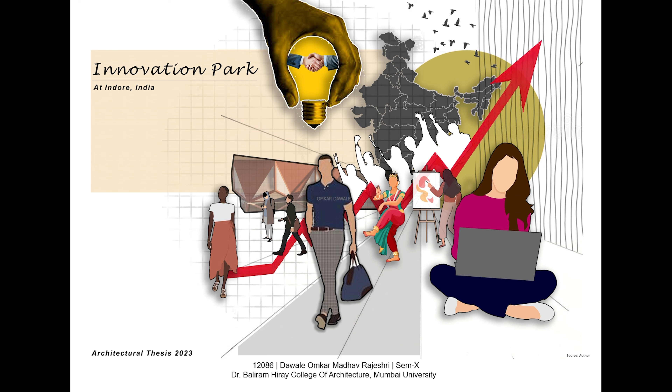The following presentation is divided into four parts: the first is the study with the intro, second is site and concept, third is the plan and section drawings, and the fourth is inside and outside spaces.

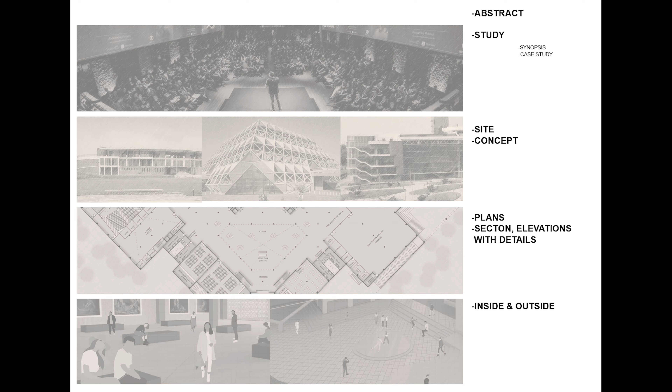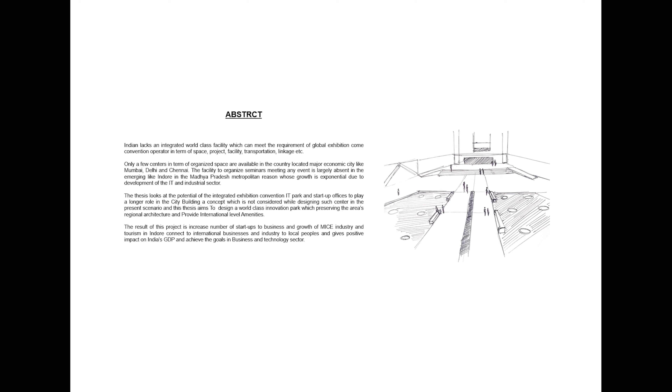Basically India is achieving in each and every sector, but lacking in business and technology. That's why the Indian government is trying to provide this type of facility, like convention centers and startup buildings, in two-tier cities like Ranchi, Indore and Nagpur, to help businesses grow in this field. As a result, the number of startups and businesses increases, helping the growth of the MICE industry and tourism in India, and connecting local businesses to international businesses.

Starting with the study, I did research on where India is achieving in each and every sector: fifth in GDP, second in population, fourth in space and research, third in agriculture, and fifth in economy, but 63rd and 21st in business and technology respectively. So where is the problem?

This is the data of the MICE industry and tourism, where India ranks between 24 and 35, based on data from 2013 to 2017, where India is not growing and not constant. The ranking will keep decreasing year by year.

There's a need for these centers, as half of the population is aged between 25 and 35, and the population is increasing year by year, but the jobs are constant and not increasing. That's why there are no jobs for normal people and engineers, and the Indian government is trying to provide startups to the new upcoming generation.

The solution is to provide this type of facility and centers in two-tier and three-tier cities as well.

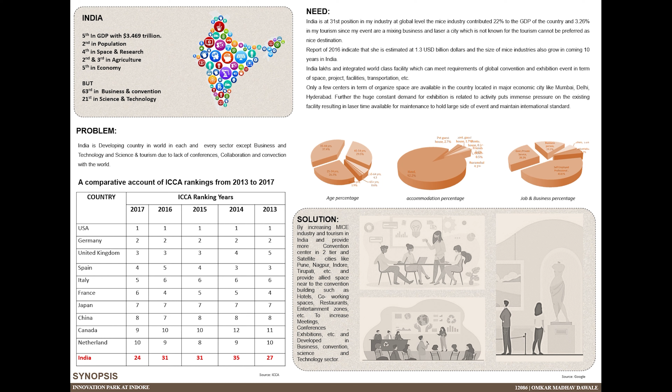Now, the aim of this project is providing an innovation park which preserves the area's regional architecture, while providing international-level facilities and amenities. These are the objectives I am following for my design objectives and scope.

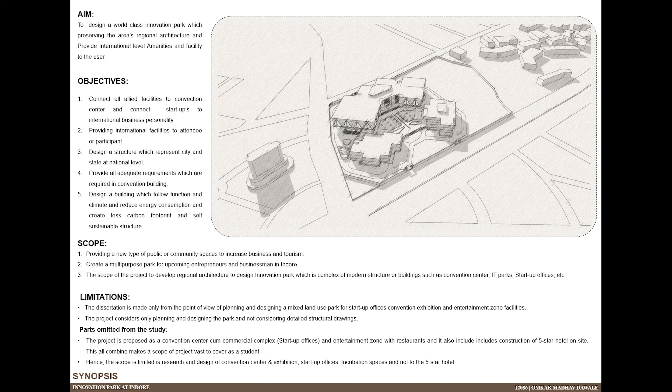As for limitations, some parts of the project I have omitted, because as a thesis for an architecture student, it's a vast topic to cover.

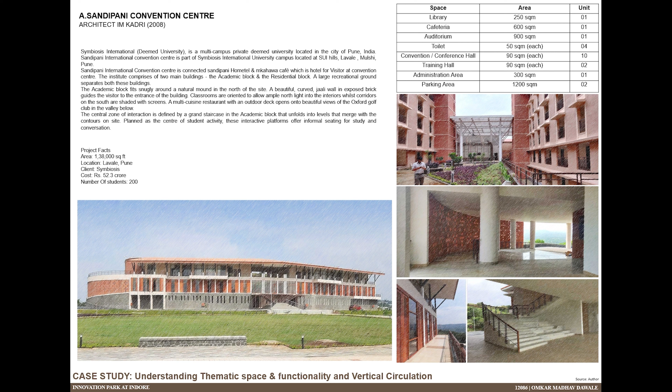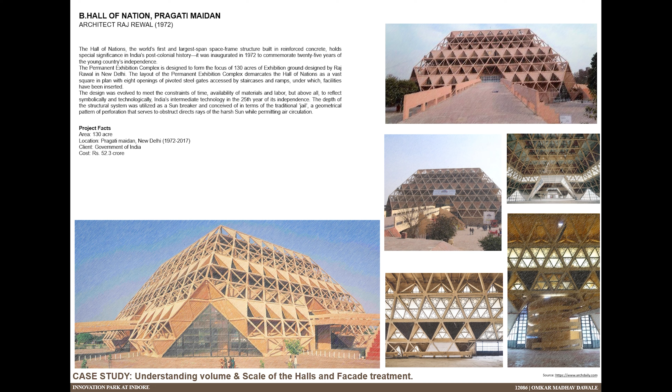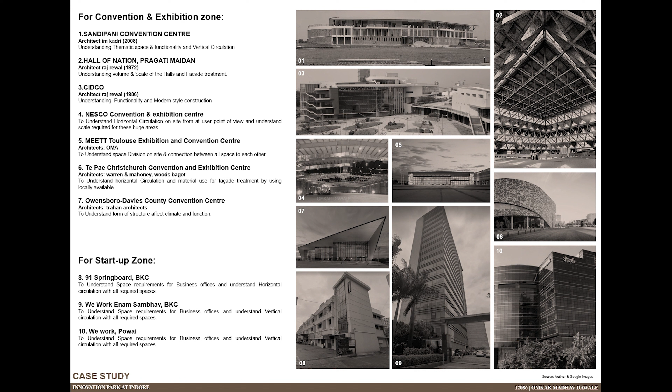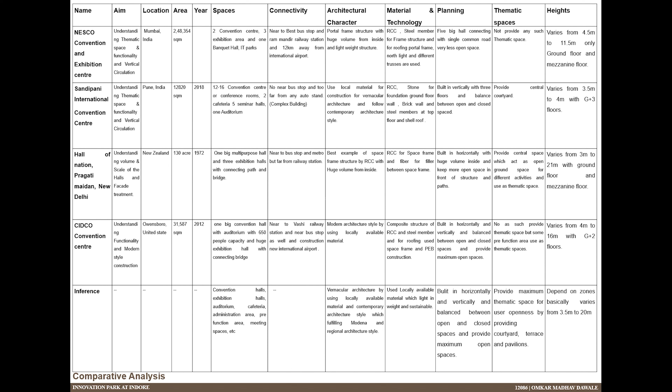These are some case studies I did from 1 to 10 for study purposes. This is a comparative analysis where I took four case studies, compared them, and finalized the inferences, which I'm using in my design.

Now talking about the site and concept, my site is located in Indore. Why? Because Indore is the 14th largest city in India, and the commercial capital of Madhya Pradesh, the biggest city in the state. Half of the population is the young generation, and the commercial industry in Indore has increased by 74%, while the literacy rate has also increased from 64 to 80%.

Talking about the history and architecture, Indore has influences from the Maratha, Rajasthani, and Mughal kings. That's why we can see architectural elements from these three influences in the structures. This is the super corridor; basically Indore is rapidly increasing year by year.

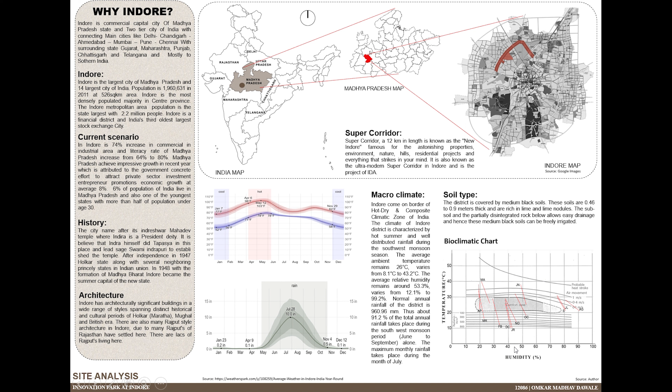Talking about the macro climate, Indore falls under the hot and dry climatic zone and composite climatic zone. The soil type is basically medium black soil, which is useful for vegetation. This is the bioclimatic chart which I drew, comparing temperature and humidity.

Now talking about the super corridor, basically it's a 12-kilometer long road with a 75-meter wide road. In this super corridor, there are multiple projects like a metro station, TCS, regional parks, medical hubs, Infosys, and sport complex, with commercial, industrial, and residential areas.

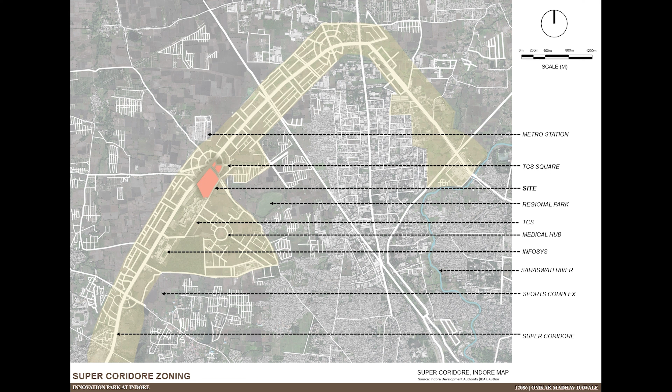Now talking about the site surroundings, at the left side of the site is the proposed five-star hotel, and next to that is my site. At the upper side there is a medical hub, and at the right side is TCS, designed by Somya Bindra Architects, and next to that is Infosys.

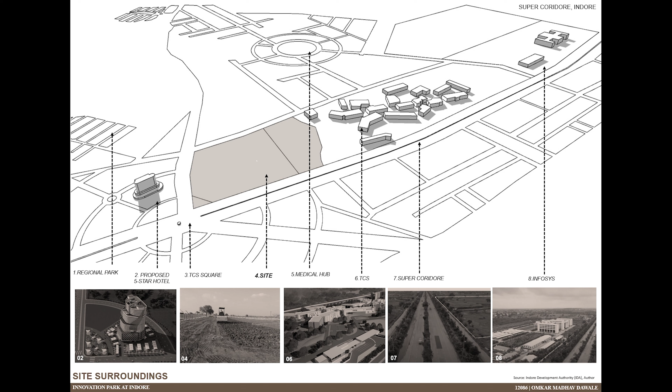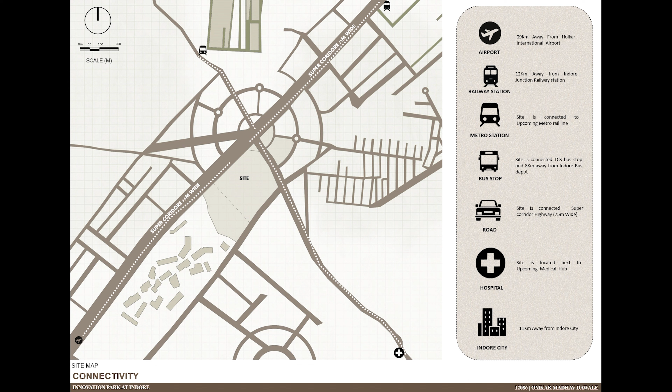Connectivity: the site is connected to the airport 9 kilometers away and the railway station 12 kilometers away. The site is connected to the metro station and bus stop, known as TCS bus stop and TCS metro station, connecting to the super corridor, which is 75-meter wide. At the right side there is a medical hub, so it's connected to that medical hub area.

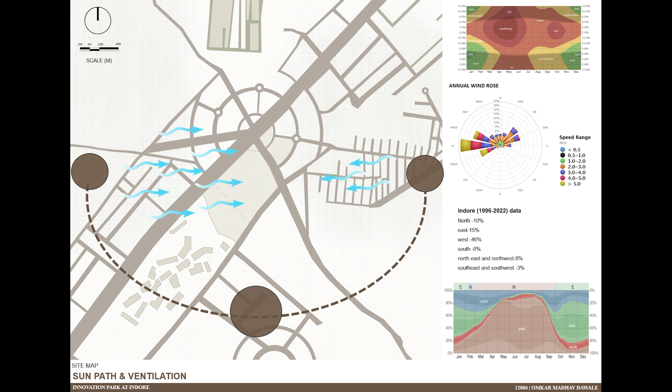In the next slide, I'm explaining the sun path and air ventilation direction, where 46% of ventilation is from the west side annually, and 10-15% from the east side in winter.

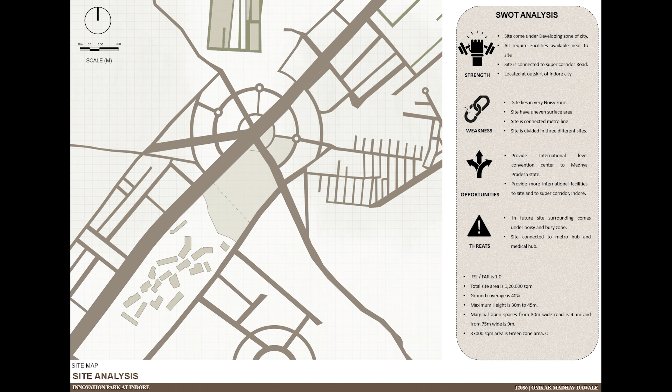The site is divided into three different plots, with the opportunity to provide international facilities and amenities to the super corridor area. The threats are that in the future the site will come under a very noisy and busy zone, which might disturb the convention exhibition area.

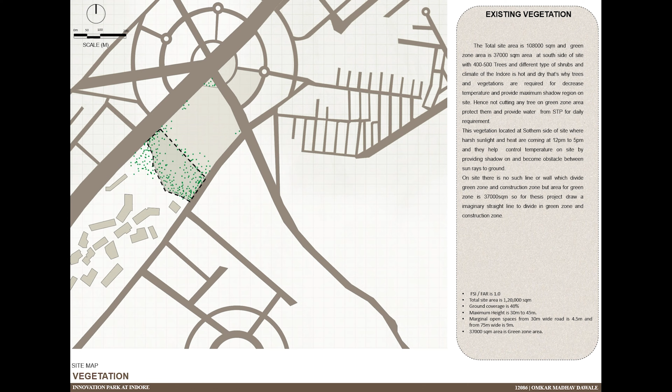Now talking about the existing vegetation, at the southern side of the site is plotted the existing vegetation, where 37,000 square meters come under the green zone area, with a total of 400-500 trees located there. That's why we can't build anything on that plot.

Now for the concept: my concept is form follows function and climate, by providing thematic spaces. Firstly, thematic spaces are spaces placed between two important things, basically terraces, courtyards, and pavilions. As an example, it's like a ghat between the river and the city, providing openness, emptiness, or breathing spaces, used for community interaction, social meetups, and breathing spaces.

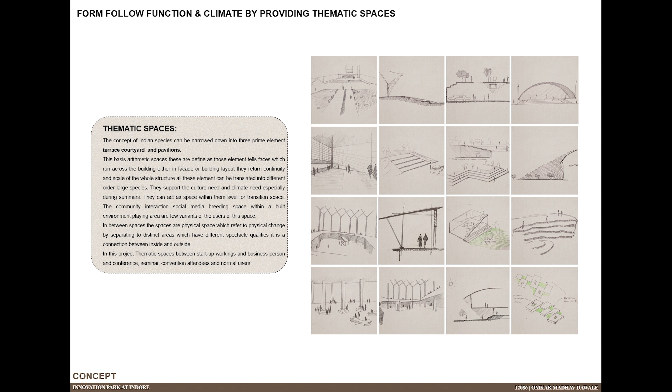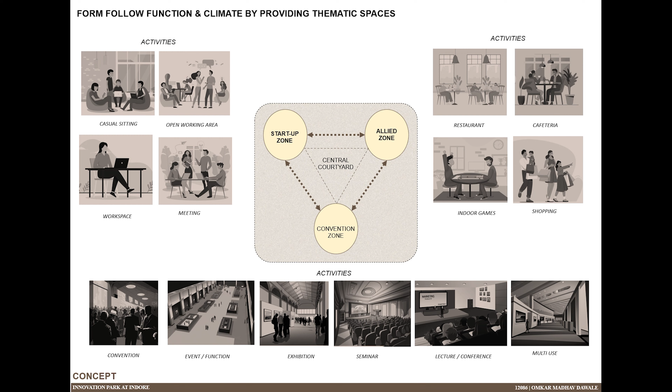Now, form follows function: I'm dividing my site into three zones based on functionality and activities. At the left side I divide the startup zone, at the right side the allied zone, and at the bottom the convention zone. At the center I'm providing the thematic space as a central courtyard. The next slide is form follows climate, where at the southern side I'm providing big huge blocks.

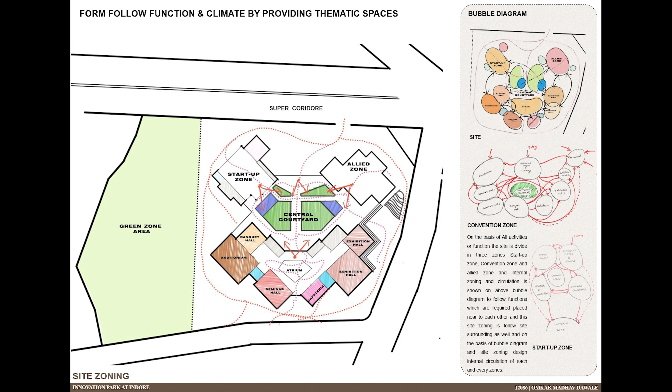Based on the schematic zoning, I drew the bubble diagram and site zoning, and these are the internal bubble diagrams of the convention and startup zones.

This is the second concept, where I'm following the climate, using cuboids as a space, providing big huge cuboids at the southern side to provide maximum shadow at the central courtyard part, where maximum shadow falls on the central courtyard, decreasing the temperature at the central courtyard part.

As I said, 46% of ventilation comes from the southern side, so I'm using the venturi and funnel effect here. In the startup zone, I lift the first floor and create a funnel to pass air ventilation through it, and provide a water body to convert the hot air into cooler air.

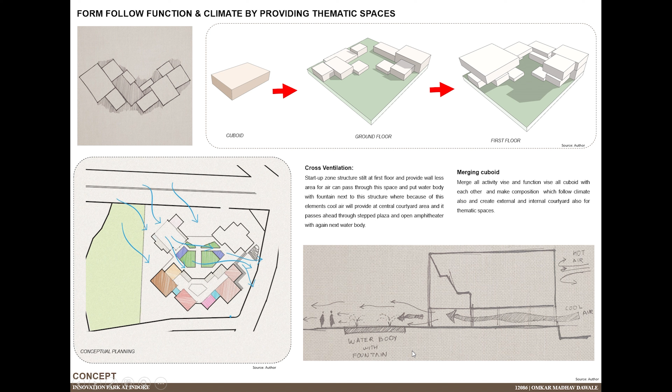Now coming on the drawings, starting with the site plan, where the site is connected through three major roads. The first road is a super corridor, 75 meters wide at the front side, and the other two sides connect to the service road, which is 30 meters wide, providing two main entries and two main exits, along with one service entry.

At the upper side is the main entrance, and here is the drop-off area. Basically the site is divided into three parts: the startup zone, allied zone, and convention zone. At the left side is a green zone area where I cannot build any superstructure on this plot. At the center is the central courtyard, and at the right side is the open amphitheater area. At the bottom is the main VIP entry and exit, and this is the service entry.

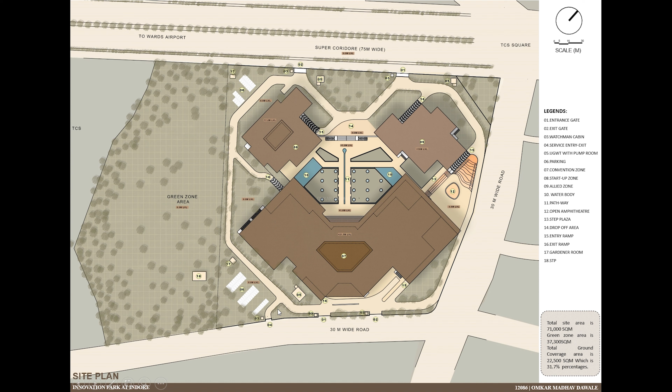The site area is 71,000 square meters, and the built-up area is 22,000 square meters.

Now starting with the first zone, the convention zone. This is the main drop-off area, and the user can walk in from here to this point, which is the main entrance, 20 meters wide with an 8-meter huge gate on this side and that side. At the entry, one experiences the huge double-heighted central atrium.

Basically I'm dividing this convention zone into two parts. The right side is for the exhibition and the pre-function waiting area with the cafeteria block, and the left side has the auditorium with the banquet hall and seminar with individual toilet blocks, providing the AHU room on the left and right sides wherever required. The exhibition hall is connected to the external step plaza area.

At the first floor, again on the left side is the auditorium hall with a small convention hall with capacity for 900 people, and next to that is an administration block with a convention room.

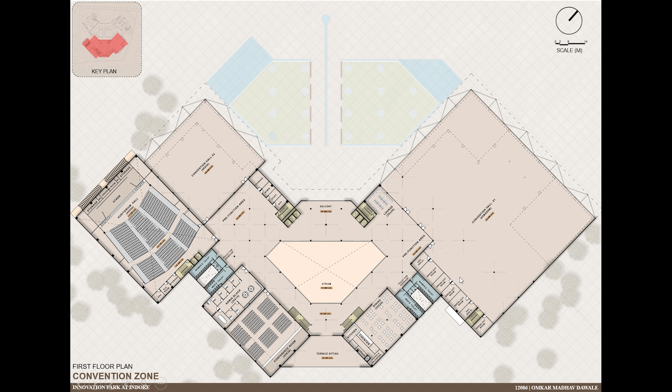At the right side is the terrace sitting or terrace balcony area with a double-heighted space. This is the cafeteria above the cafeteria block and the toilet block, with a multi-purpose room or convention room. This is the main convention room with capacity for 2500 to 3000, with breakout rooms required for conventions or conferences.

Now coming to the startup zone, at the ground floor I'm providing casual sitting or open sitting area where people can sit, work, and eat. Multi-purpose activity and multi-use for multiple activities can happen at the same time, and this is open for all. Basically at the ground floor this is a wall-less structure, only columns are provided.

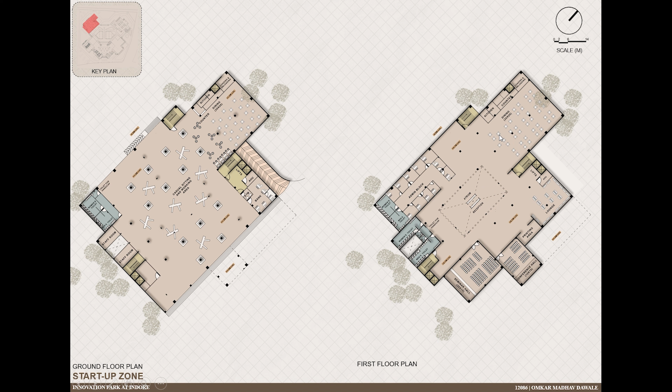At the first floor, I'm providing the reception area with waiting area and admission block on the left, and the cafeteria block for everyone, plus meeting and conference rooms. Coming to the second and third floor, these are basically office areas or startups where people can buy or subscribe rooms for a period of time, as part of the working subscription.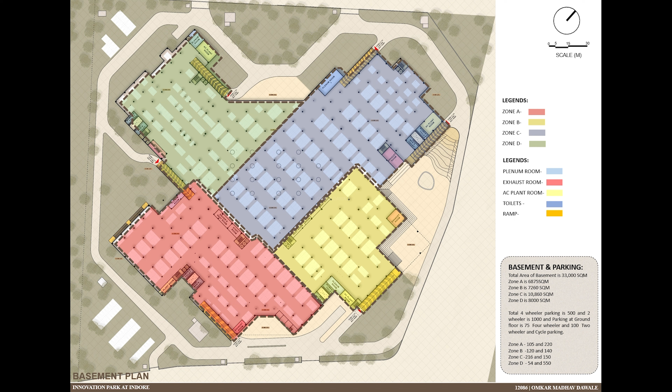Coming to the basement, I've divided it into four parts: red, yellow, blue and green, where each zone provides individual plenum, exhaust and AC plant rooms. The total basement area is 33,000 square meters, with total four-wheeler parking for 500 vehicles and two-wheeler parking for 1,000, with ambulance parking provided at the ground floor only.

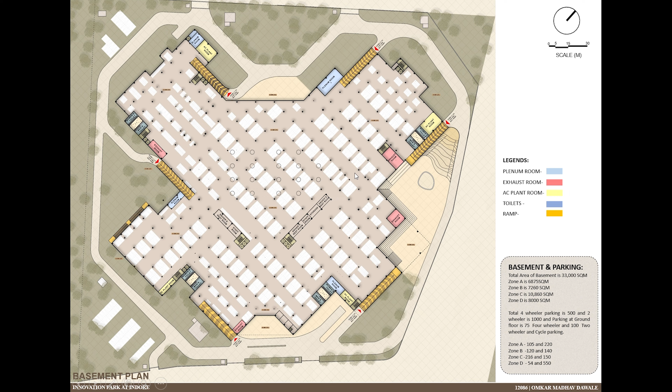Now coming to services, for water supply and drainage I'm providing 3 UGTs for the three different buildings, because the distance between two UGTs is more than 100 meters.

That's why I'm providing individual UGT for individual buildings, and this is the detail of the UGT. The second is the calculation of the underground water tank.

Next is the STP calculation, where I'm providing the IC chamber for each and every building. The startup and convention building connects the IC chamber to the STP, and the third zone is the allied building, which is connected to the municipal drain because it's far from the main STP, and it's basically a future expansion building. So thinking of the future, I've connected it directly to the municipal drain.

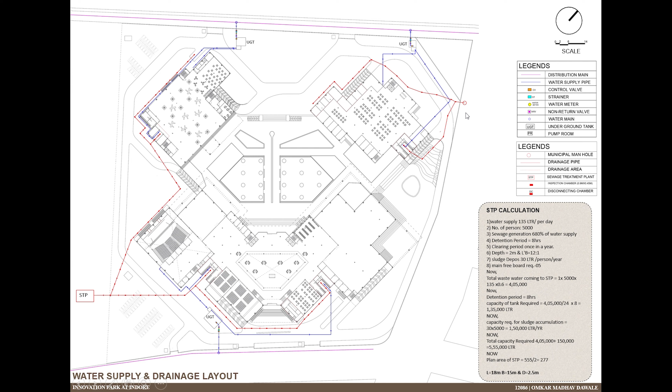Coming to the electrical layout, where I'm providing the electrical substation, feeder pillar, and different meter rooms in the structure, and the different types of wall lights connection, landscape bollards and pathway lights, street pole lights, and waterproof LED lights as well.

The electrical substation is provided at the existing location, exactly where it exists, and the feeder pillar is provided at 45-meter center to center distance, and a meter room in each and every structure.

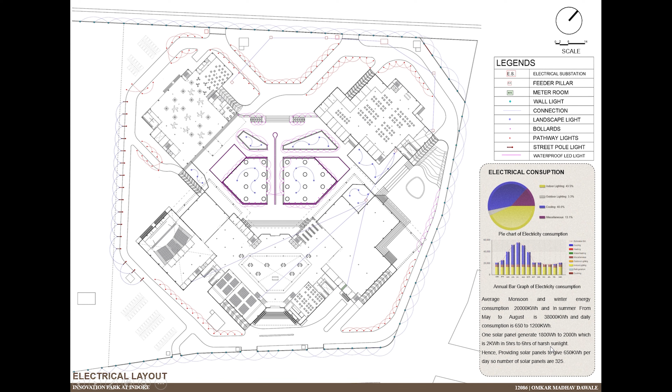This is the annual calculation of electrical consumption by the structure, divided into daily consumption use, where my structure is using basically 650 to 1200 kilowatts of electrical consumption. For that requirement, 325 solar panels are required for the electrical consumption.

Coming to the third service sheet, which is the fire hydrant layout. The fire hydrant layout is connected to the rainwater harvesting tank. This is the calculation for the same, providing fire hydrants at a 45-meter center to center distance.

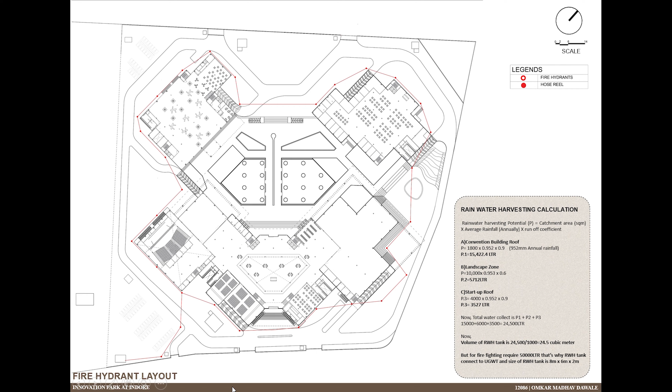Coming to the mechanical ventilation layout at the basement, where the basement is divided into 4 zones. Each zone has a plenum and exhaust zone, which varies from 65 square meters to 125 square meters with respect to the zone areas. The blue one is the supply pipe, and the red one is the extract pipe, and this is the sectional detail of the duct at the right.

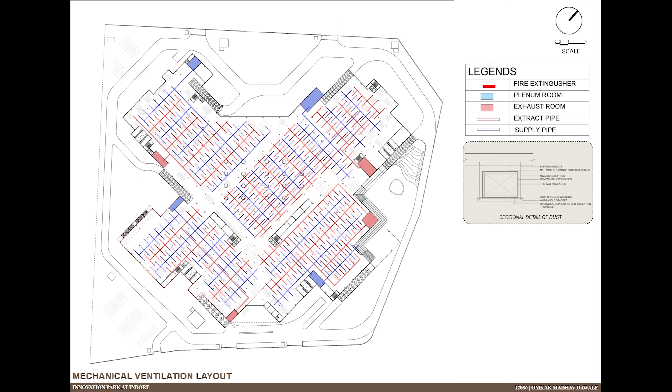Next is the air conditioning layout, at the ground basement and at the first and second floor, providing AHUs at the other floors. The blue one is the supply duct, and the red one is the return duct, which is 450 mm in diameter, or 450 by 450 in distance.

This is the sprinkler layout which I am providing in the basement, required at the basement and connected to the main duct at each and every zone. This duct also goes through the first and second floor for the toilet block, as well as the fire duct.

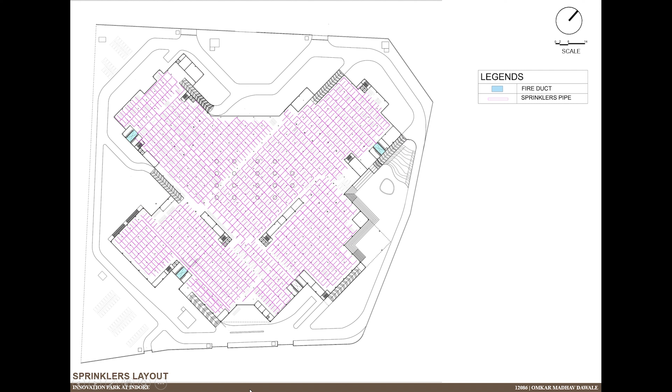I'm providing the emergency lighting layout, where the lights are provided at the driveway path area, which are basically sensor lights. The structure basically operates during daytime and afternoon, but sometimes it works in the evening or night time, and at that time it will be usable.

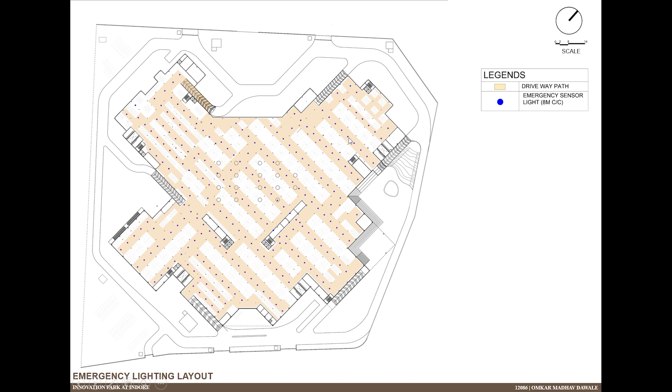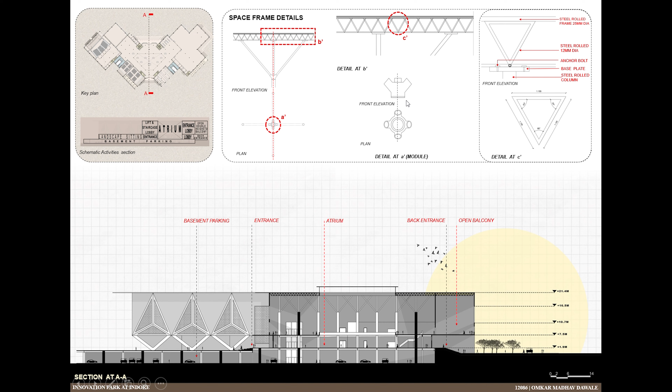This is a detailed sectional detail. These are the details of the space frame, showing the connection between the RCC column to steel beams with the space frame. This is the detail of the steel column to the space frame. This is a module I'm using here, and this is the space frame detail, and this module connects the RCC column to the steel beams. This is the plan for the same.

Coming to section BB, which cuts the plan diagonally, where this cut is at the left side of the auditorium block with the basement area, and at the right the center atrium with the hydraulic lift and toilet area, and at the side the seminar hall, followed by the open balcony elevation and the other elevations.

Above that, the detail section at A dash, where I'm showing the basement detail, providing the external wall with the window or opening, which is an openable window for ventilation and light purpose, and these are the details for the same.

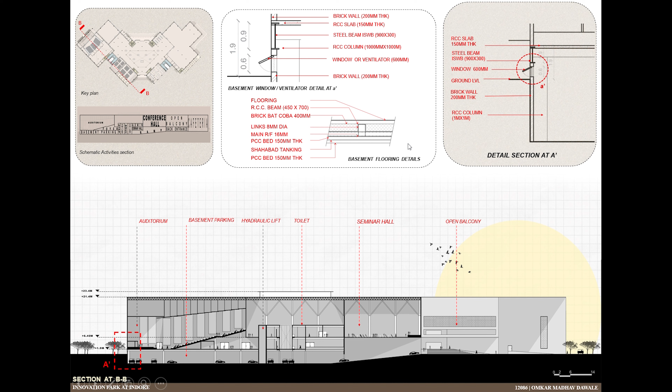Coming at section CC, which is cutting diagonally through the exhibition hall and the multi-purpose hall. At the left side is back entrance with the open balcony area, and next to that is the central atrium part, and next to that the basement parking and the multi-purpose hall, which is 15 meters in height.

At the ground floor they're providing the exhibition hall, which is connected at the right side to the step plaza area. Above that is detail section B dash, showing the facade treatment on the first floor, where I'm using jali detail on the facade, which allows only light.

This is basically the facade treatment, which is a tetrahedral shape that comes out and in. You can see the isometric view on the plan and elevations as well.

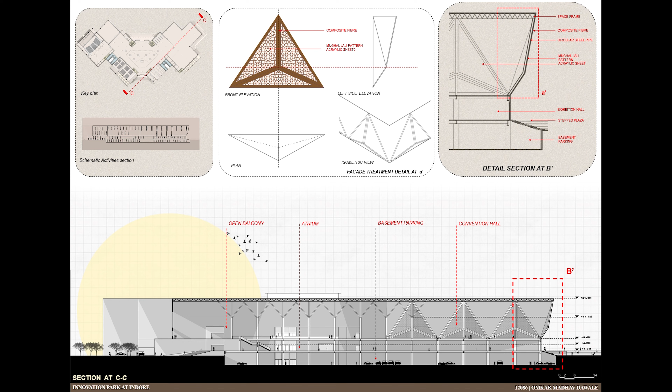Above that, section C dash shows the connection between the RCC column to the steel column with the space frame and the skylight.

As I'm following the regional and local architecture, that's why I'm providing this jali detail, where the jali module represents the detail of Mughal architecture, which allows only light in some spaces, but in other spaces allows both light and ventilation as well.

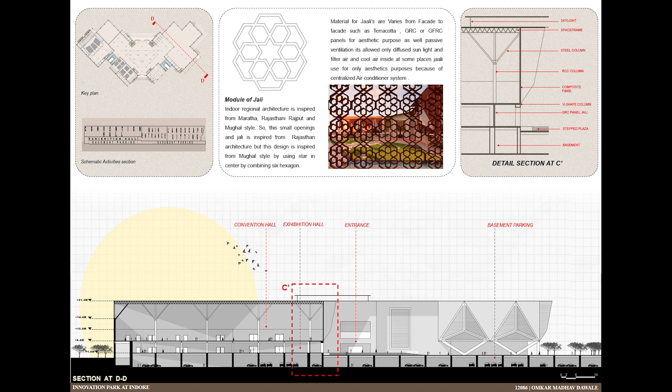Coming at section EE, which is cut diagonally for the startup zone. At the left side at the ground floor, this is a casual opening area or casual sitting area.

At the first floor is the central atrium with the reception area, and the second and third floor is the working area, with the right side being the open terrace area, which is a transition space for the workers, startups and local businesses, where they provide a thematic space where they can meet, gather and have talks between them.

For the construction, I'm using a composite type of construction with RCC and steel structure, where external columns are 1 meter by 1 meter in dimension and internal columns are 750 by 750. External walls are 200mm, internal walls are 100mm, and slab thickness is 150mm thick.

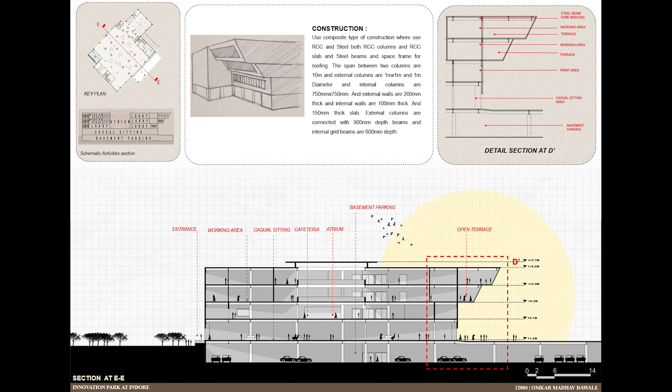Now coming at section FF, which is cut diagonally on the other side, again for the startup zone.

At the left side is the staircase block, showing different levels and internal heights, and at the ground floor again the open sitting area and open working area, the reception and cafeteria block, and the second and third floor with the toilet block.

As shown in detail E dash, I'm showing the detail of the skylight, which allows only light for the central part while avoiding air and water, and it removes hot air from the skylight at the angle level over here.

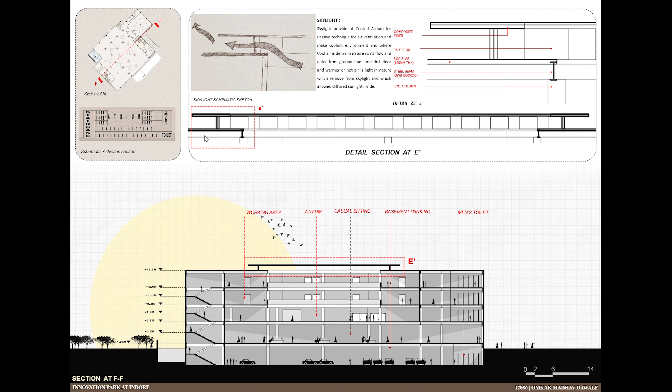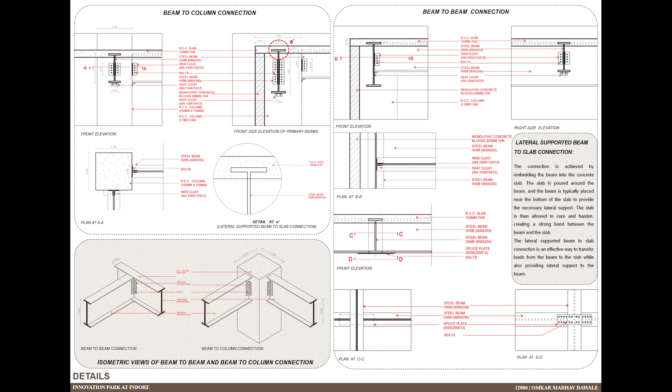For the connection between the beam and the slab, I'm using a laterally supported connection, which helps carry the maximum load as a lateral unsupported beam, and these are the isometric views for the same.

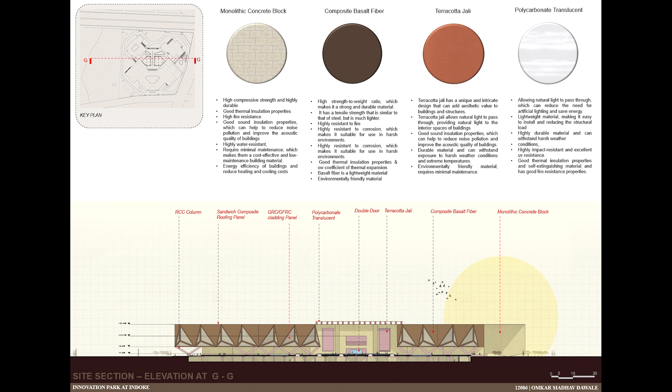Now coming at the elevation, section elevation at GG, cutting the horizontal side, showing the front elevation of the main convention primary structure. I'm using monolithic concrete for the ground facade, composite basalt fiber at the first floor facade treatment, terracotta jali for the jali details, and polycarbonate translucent material for the skylight, which allows only diffuse sunlight and not air and water.

Coming at the section elevation at HH, cutting diagonally through the site, showing the startup buildings, the secondary building and the convention building, where I'm using GRC and GFRC cladding panels for the first floor jali details, which allow only light, not air and ventilation, for the centralized air conditioner inside the structure, and some sandwich composite roofing panels which diffuse and reflect heat and light, and RCC columns and red sandstone for the landscape area.

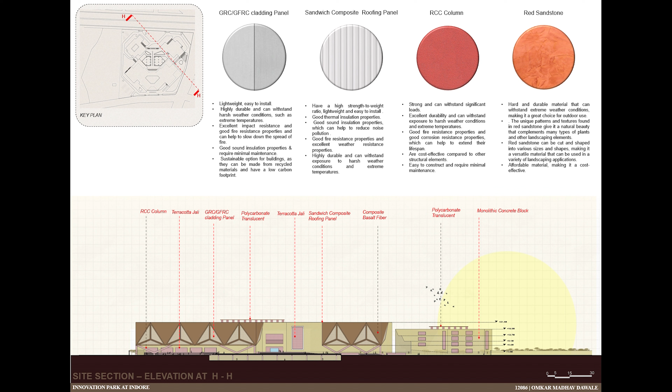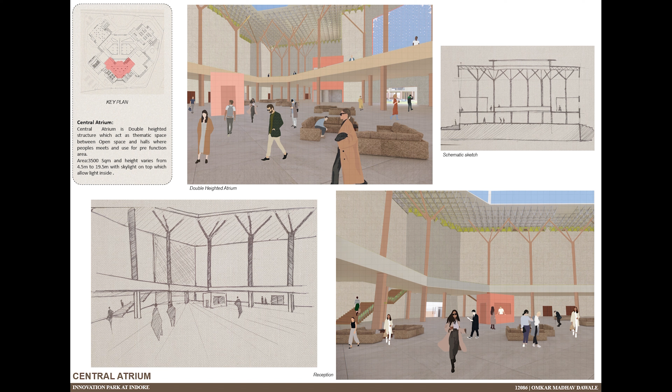Now talking about the inside and outside spaces, the central atrium is basically used as a thematic space, a connected breathing or open space which provides for the user where they gather, meet, and have community interaction. The height varies from 4.5 meters to 19.5 meters. These are the some sketches and views of the same.

Second is the waiting area and the pre-functional area. Again, I'm providing thematic spaces with large openings. This opening is provided at the jali detail, but only allows light, not air, by providing glass from the inside. And these are the sketches and views.

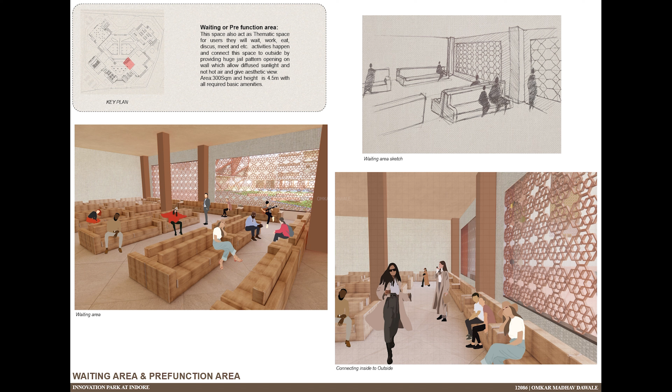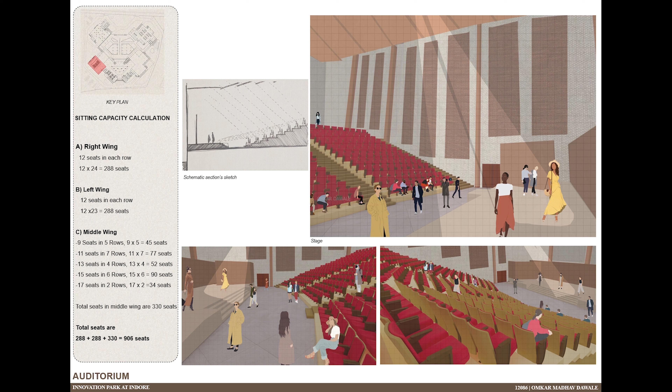Coming at the auditorium block, where I'm providing the auditorium for 900 people. By calculation, at the left there is a right wing and left wing with 288 seats, and the middle wing provides 330 seats. For handicapped people, the first row sitting area is provided.

These are the sketches and views for the same, providing acoustic treatment at the walls for reverberation time. On the left side, I'm providing the reverberation calculation using Sabine's formula, and the result of this solution is 2.033 seconds, which is in the acceptable range. And these are some sketches, sections, and views for the same.

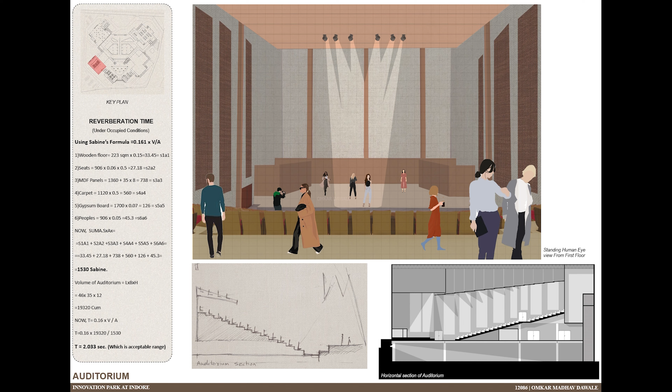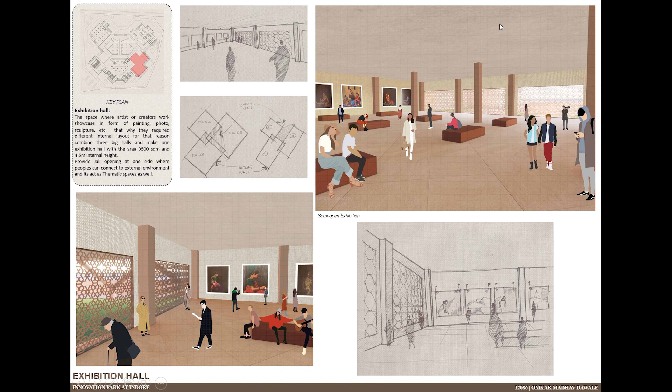And the total area is 3,500 square meters, and it's connected to the external state plaza area as well.

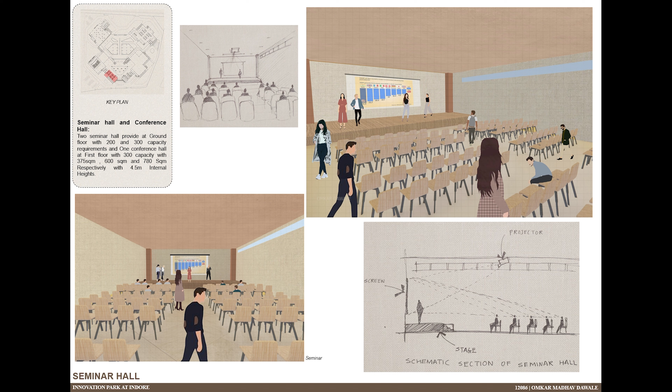Now coming at the seminar hall, basically a typical seminar hall providing diffuse sunlight or daylight through a small window on the right side, above, which allows only diffuse sunlight, not air and rain. Coming at the convention and multi-purpose hall, these are some sketches and views.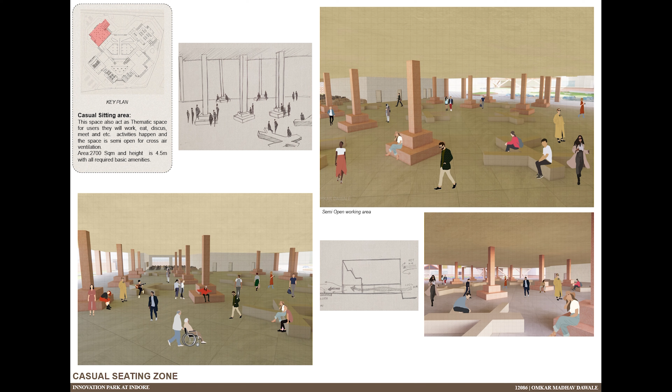This space acts as a thematic space as well. As you can see in the key plan at the left side, this is a startup zone, a plan of the same casual sitting area.

At the right is a drop off area with the basement parking here. The car will go from this direction into the inside of the structure.

This is a drop off area where people and users can be dropped off by public or private transport. If it's public transport, it will go out from this direction. If private, it will go into the basement only.

There are total six ramps, three for entry and three for exit, which are 6 meter wide two-way ramps.

This is the central pathway area, with the center providing water bodies and garden area with skylights in between them. It acts as a landscape element, but it's used for sunlight and diffuse sunlight for the basement purpose.

At the right side is the allied building and the convention building, and at the right side is the step plaza and open amphitheater, used for both the same purpose.

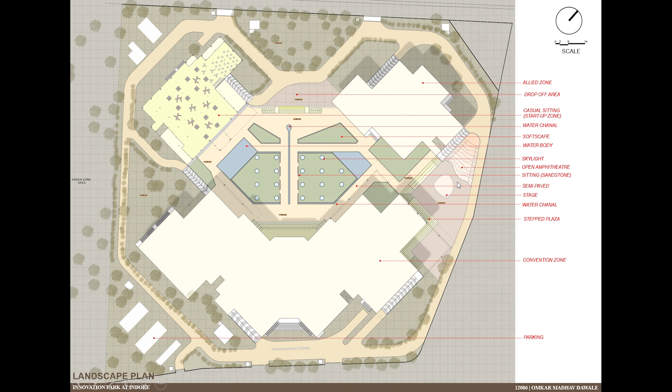Coming to the landscape views, these are some initial sketches used for the purpose of landscaping. This is the central pathway area over here.

With the water canal at the center, this is a drop off area where people can drop and come to the central courtyard area, which is lifted to a 1 meter height.

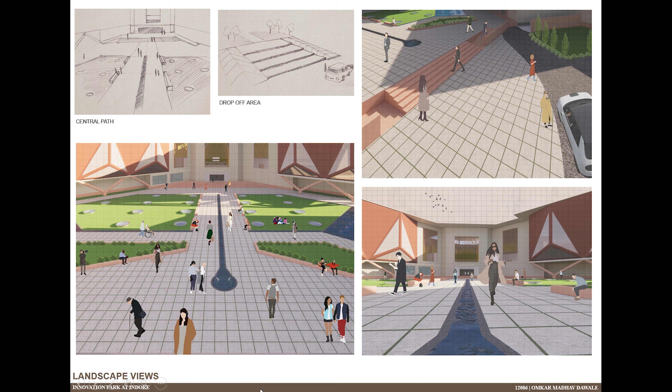These are the details of the skylights, shown in the central courtyard area, used as a landscape element and also at the basement for daylight purposes.

This is a big entrance with water bodies and water canals for the requirement of the passive strategy, using cool air for cooling the air at the central courtyard area.

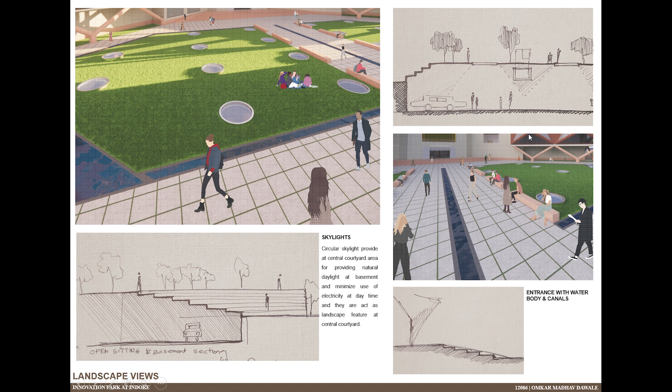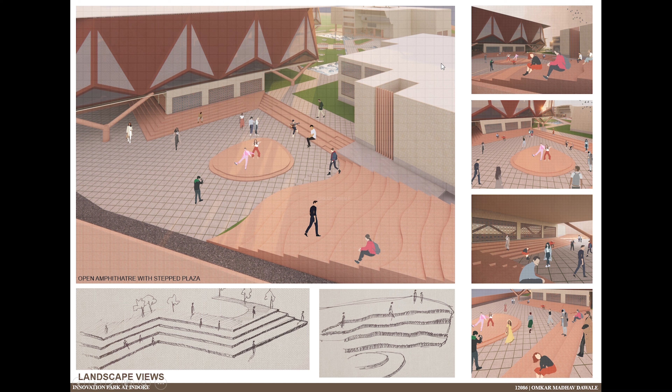This is the step plaza and open amphitheater area where multiple activities happen at the same place, where people can enjoy different types of activities at the same time.

These are the landscape details showing the waterproofing sandwich detail, and at the right side you can see the section of the basement with the cutting at the ground floor.

This is a water body, that's why the water will not leak and harm the basement area. That's why I'm providing the waterproofing sandwich detail over here.

These are the details of the water canals, skylights, and sitting area at the left, and at the right side the water canal detail with the waterproofing details.

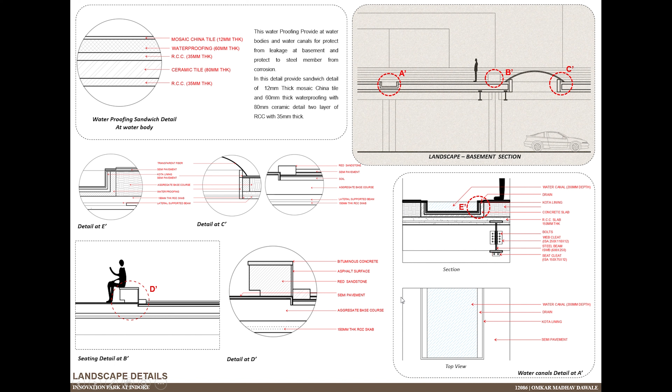These are some views of the central courtyard, which is connected to the drop off area, to the central path, to the main convention zone with the primary zone, and the water body and sitting area at the central path area.

Again the same view from a different angle.

We show the front elevation of the convention building and the facade of the zone building. These are views from different angles and locations.

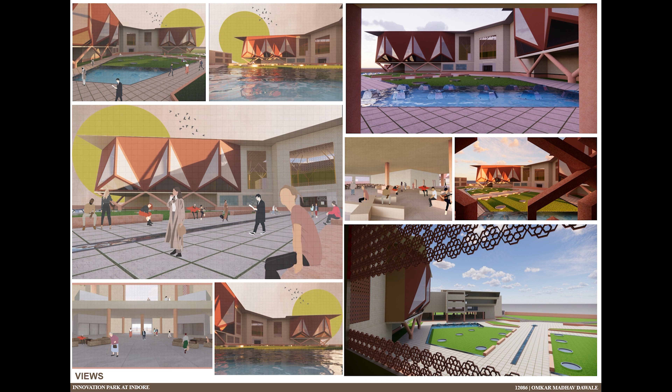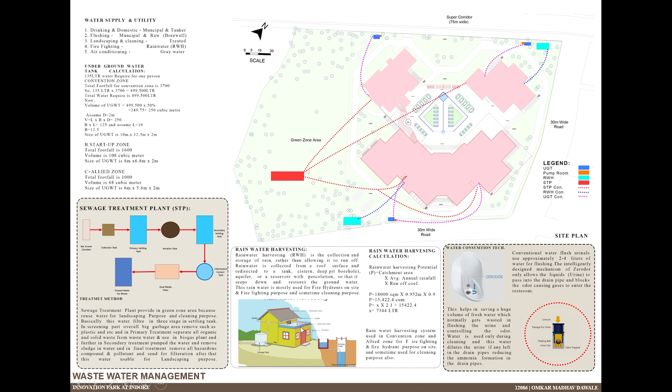That's why I'm using the Zerodor machine for the urinals, which is a waterless machine that doesn't require water in the urinals, only for cleaning purposes. Recycling and reuse is achieved by providing the STP and rainwater harvesting tank.

Next, waste management, where I'm identifying what type of waste is produced at each zone. Again using the 3R's, I'm reusing the waste through recycling processes for composting and vermicomposting, provided in the green zone area, along with a biogas plant in the green zone area.